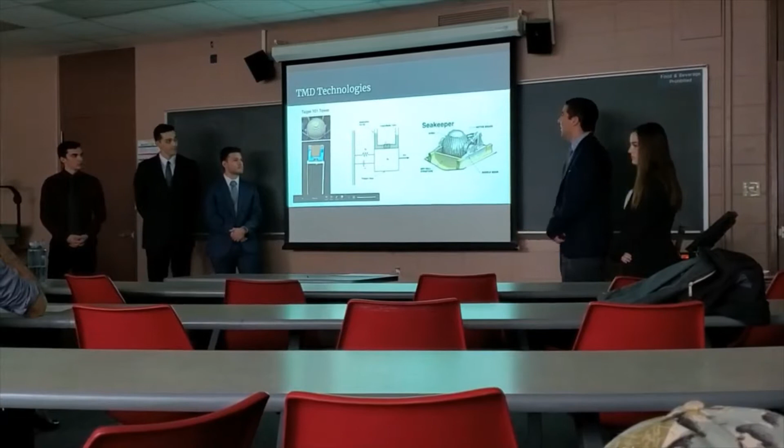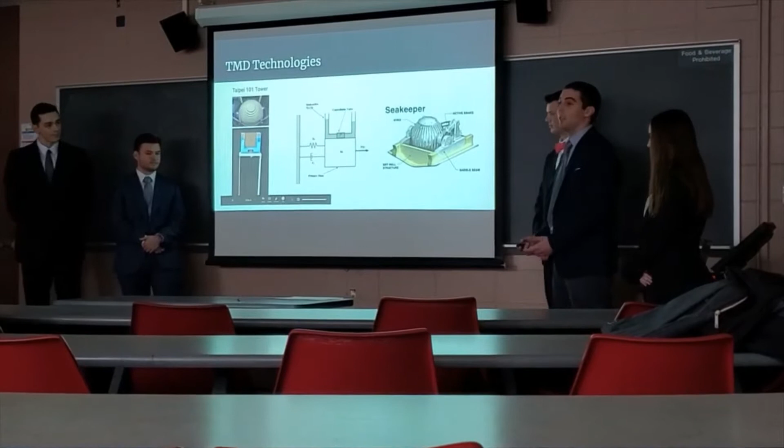In the literature we performed, we found various uses of tuned mass dampers. Tuned mass dampers are in civil structures such as skyscrapers, such as the Taipei 101, as seen in the first visual. This is a passive pendulum damper, which relies on a mass swinging at a specific frequency to counteract the acceleration on the structure. Another form of a passive tuned mass damper is a tuned liquid column damper, as seen in the second visual. A tuned liquid column damper relies on the movement of the liquid in a U-shaped container to counteract the forces on the structure.

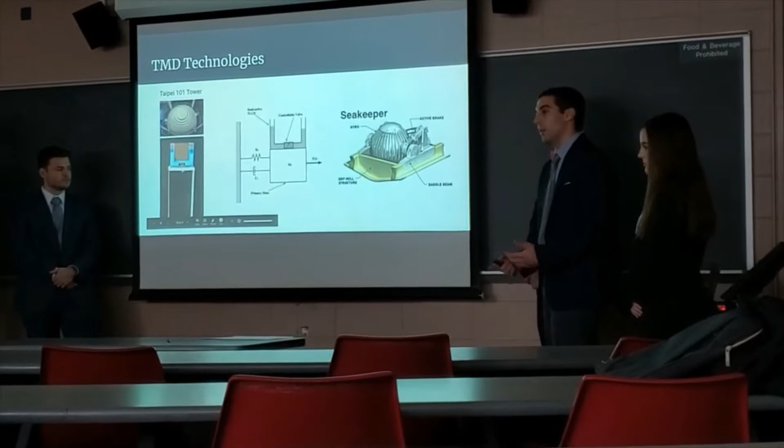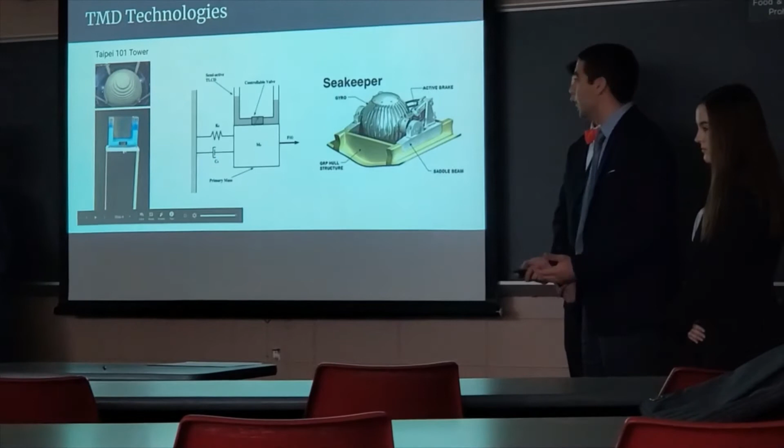The spring force in the tuned liquid column damper is the difference in height of liquid in the container, and the damping is the result of the liquid traveling through an orifice located at the bottom of the container. The downside of a passive system is that it cannot be adjusted during operation, which would require an external power source, sensing, and a controller.

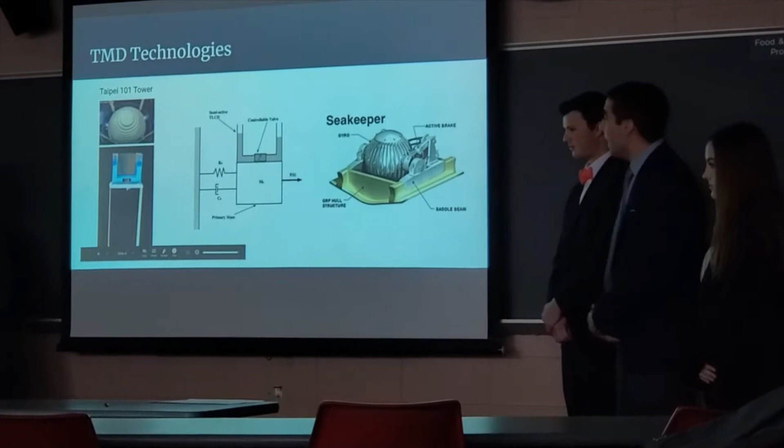So a semi-active system that we found was a semi-active tuned liquid column damper, shown in the third example, and this relies on a variable control valve to adjust the size of the orifice that the liquid travels through to inherently adjust the damping of the system.

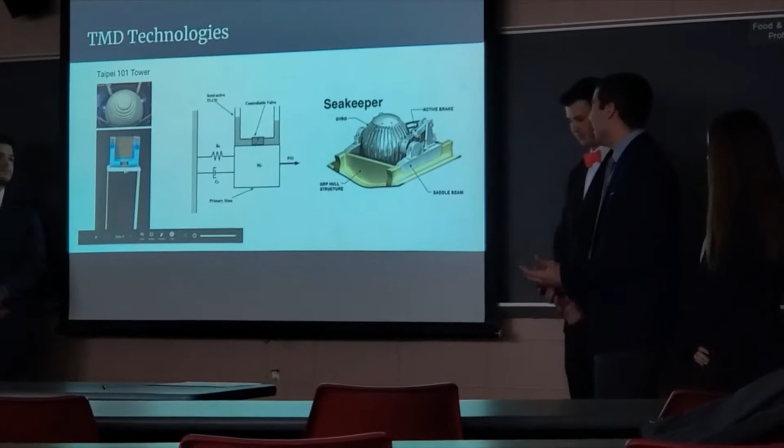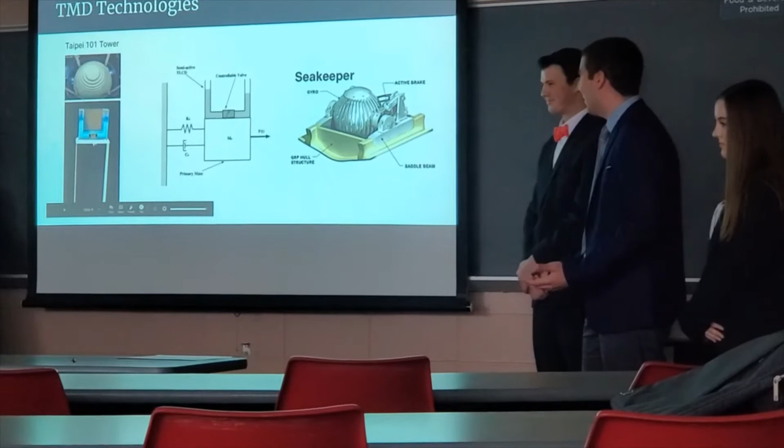Another example of an active system we found, actually fixed in boat hulls, was the Seakeeper, as seen in the last visual. This is an extremely expensive active gyroscopic damping system starting at about $22,000, which is definitely not feasible for our project. This system relies on a flywheel in a vacuum container fixed into the boat's hull, which spins at a really high frequency, creating an angular momentum to create a torque to the system.

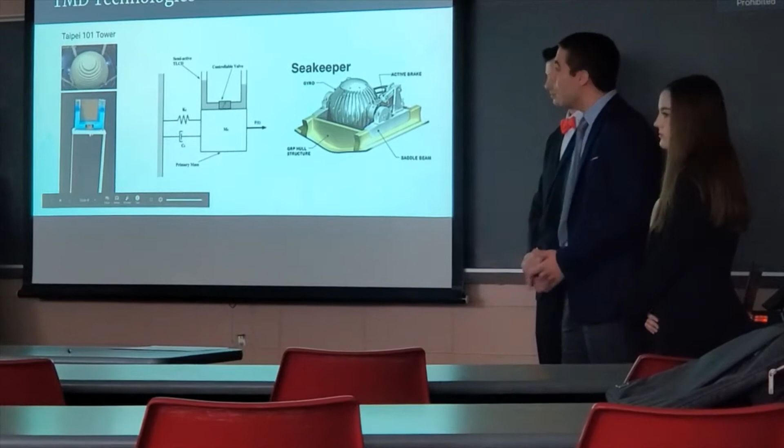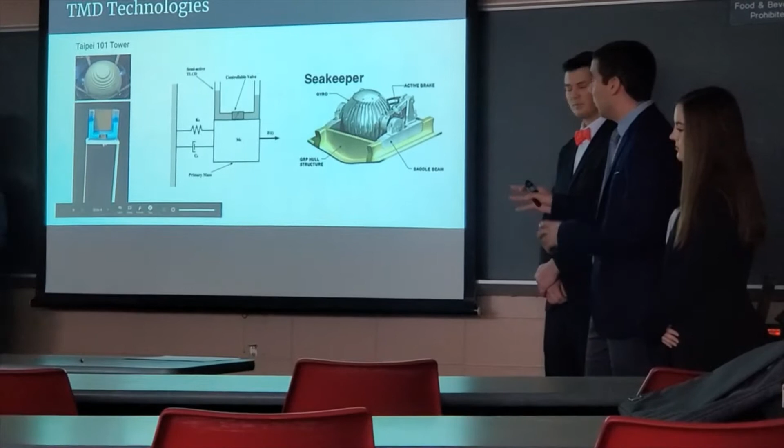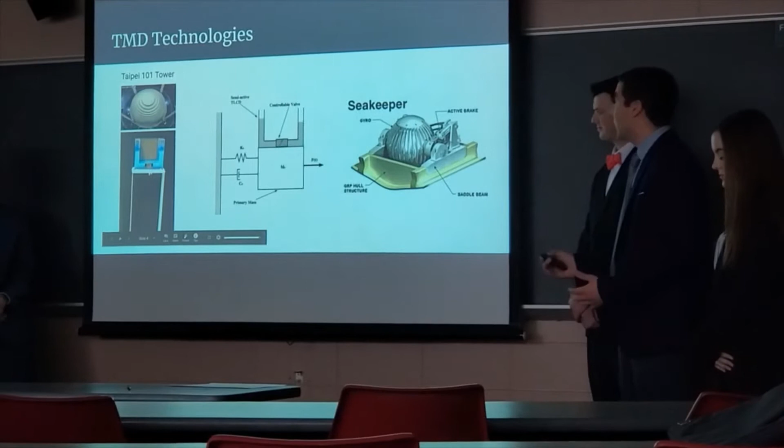This will create a force of torque to stabilize the structure against waves hitting the boat. The active support of the structure will tilt the gyro so that it will provide a wide range of torque at various sea states. Based on these technologies, it guided our design concepts, which were also based on customer needs.

We also came up with a category of importance, on a scale of 1 to 5, 1 being not so important, 5 being incredibly important. We used the results of the surveys and our personal opinions on what we would need and how important they would be to come up with these values.

The first thing I'd like to talk about is the ability to stabilize a kayak. We gave that a 5 because that's the core of our project. If it's not able to stabilize a kayak very well, there's no point in doing this project. Another one is low cost.

Most of the surveys said they wanted it to be under about $100, which is what we're shooting for in cost. We gave that a 5 as well, because that's pretty much the main thing everybody hit on in the surveys.

Another one is the effect on kayak speed. We didn't want to mess with the speed of the kayak at all, because we wanted to keep the experience of kayaking as similar as we can to without the system, other than hopefully it would just be a smoother ride and not tip back and forth as much.

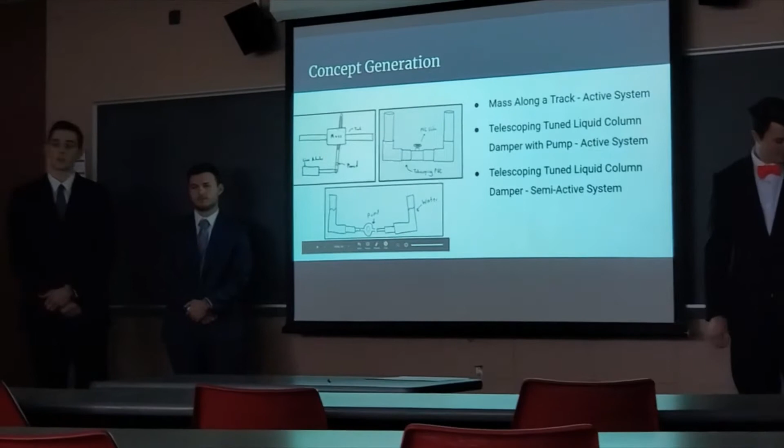After getting together as a group, we saw that some of our concepts had similar or the same components, so we combined them into the same idea. Ultimately we had 6 different concepts that we put through our concept selection matrix, 3 of which stood out in particular.

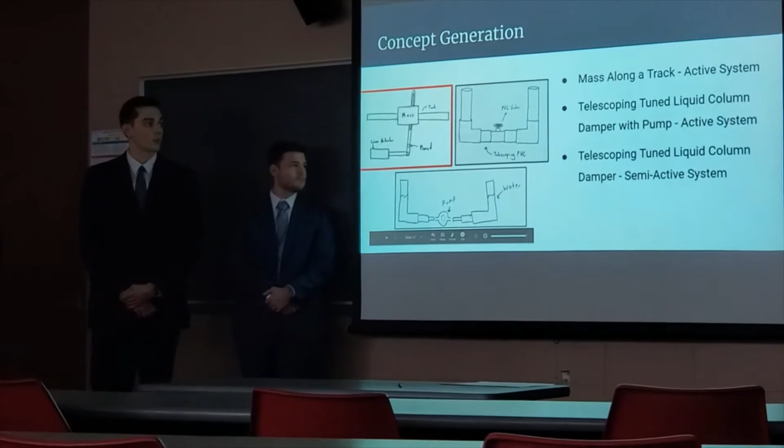The first one was the mass along a track. This is an active system which uses feedback from sensors to drive a linear actuator, moving the mass along with the kayak and changing the center of mass of the system.

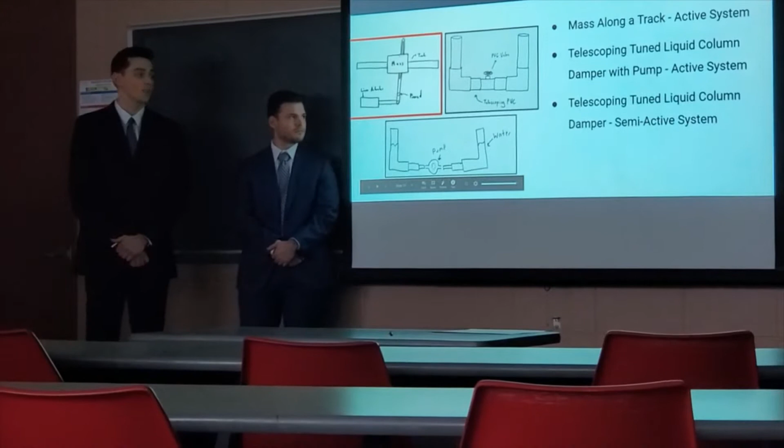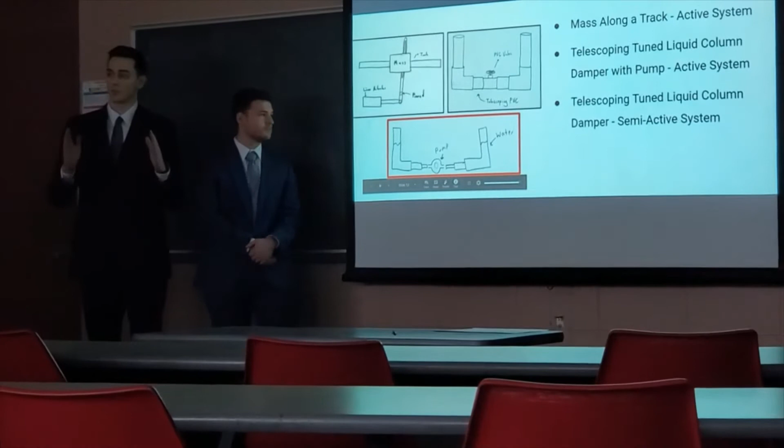The second one was a telescoping tuned liquid column damper using telescoping PVC. Telescoping PVC is a set of interlocking PVC pipes that we could use in the system to fit different kayak widths. This is an active system because it uses feedback from sensors to drive a 2-direction pump.

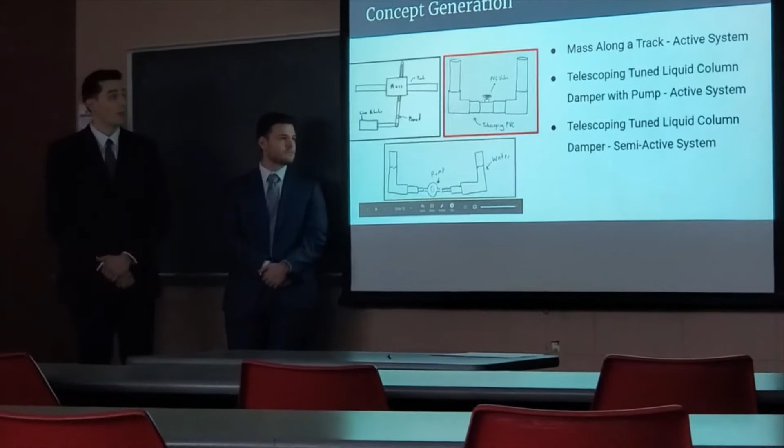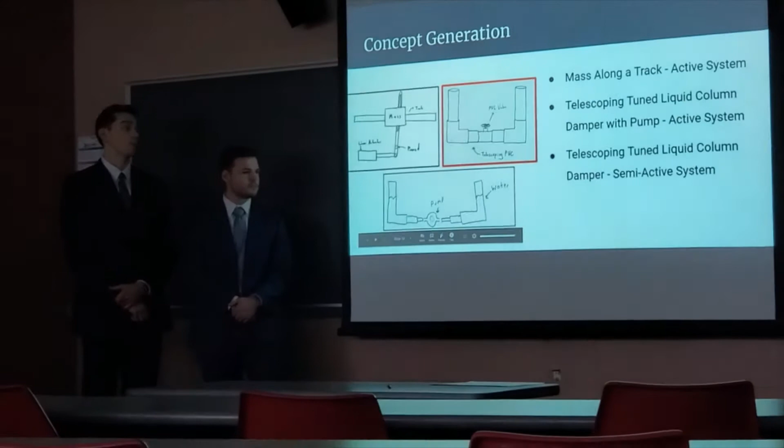This pump dampens the system. The third one was also a tuned liquid column damper using telescoping PVC, however this one was only semi-active because instead of using a pump to drive the damping, it controls the position of a valve, which then changes how the liquid damps the system.

In order to decide which design we wanted to move forward with, we developed a concept selection matrix. As mentioned before, we have the needs and the importances from the surveys at the beginning of the semester. We rated these on a scale of 1 to 5, with 1 being the worst, 5 being the best. I'll go through 3 of the designs here, pros and cons.

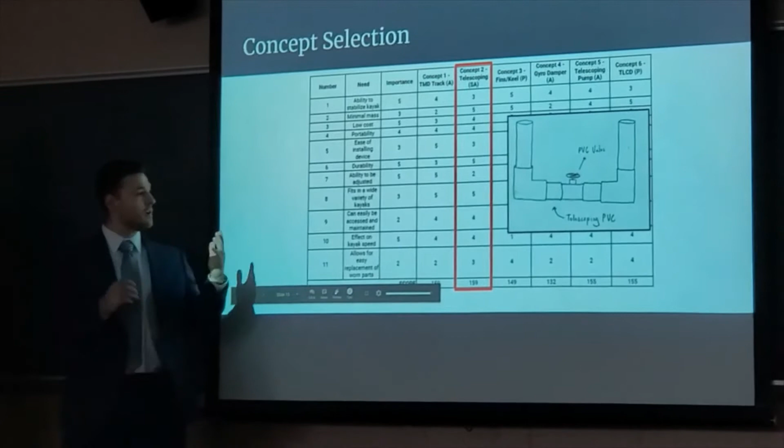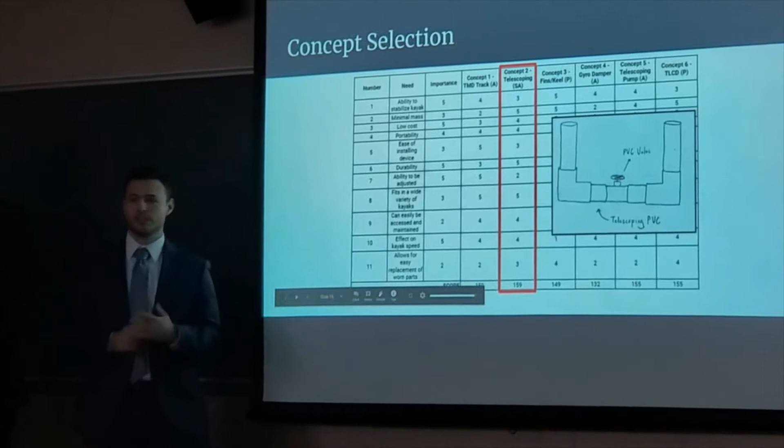The first one is the semi-active telescoping system. The pro of this system is that the telescoping PVC allows it to be adjusted to fit different size kayaks. One of the cons is that it has to be manually adjusted by the user, which is too much work, which we don't want.

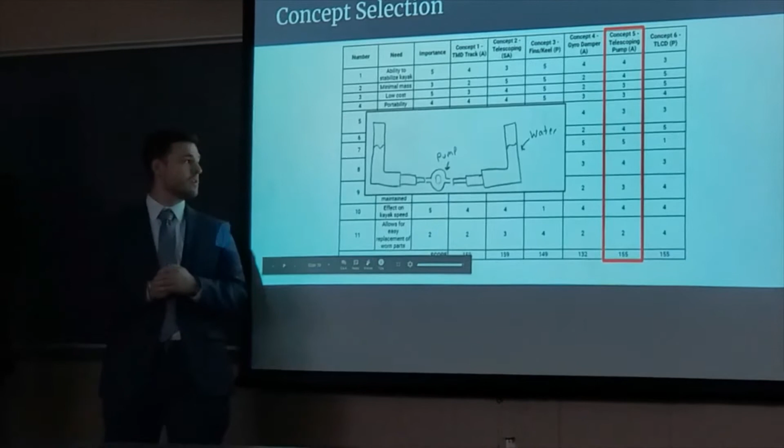The second one is the telescoping pump, which is an active system, meaning the user doesn't have to adjust anything — it automatically adjusts. One of the negatives of this system is that the pump has to be a 2-way pump, which is too much work for us this semester.

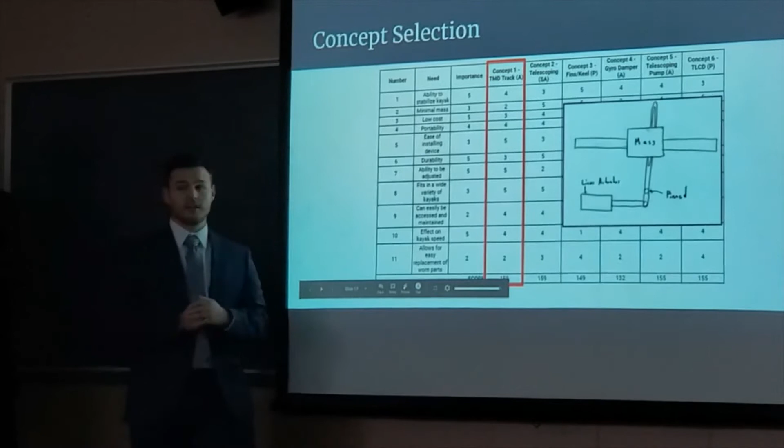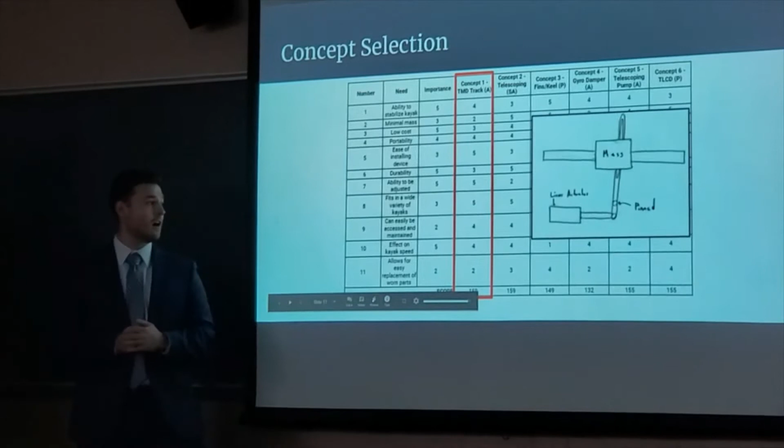And the third and final design, this is the one we're going to move forward with, is the tuned mass damper on a track. That image is the initial design. We've since tweaked it a little bit, as you'll see in the SolidWorks. One benefit of this is the ability to automatically adjust without the user having to do anything. But of course there is a negative, which is the mass of the system. This system is a little bit heavier than a couple of the other ones we've talked about because it has a mass attached to it, but that's something we're going to try to minimize as we move forward.

So how the experiment actually worked: we had Dr. Stewart in the boat to begin with, but after a little bit of testing we realized it was too difficult to do with someone that's not a neutral mass, because when people are actually in kayaks they tend to balance it themselves. So realistically it's not a good way to measure it.

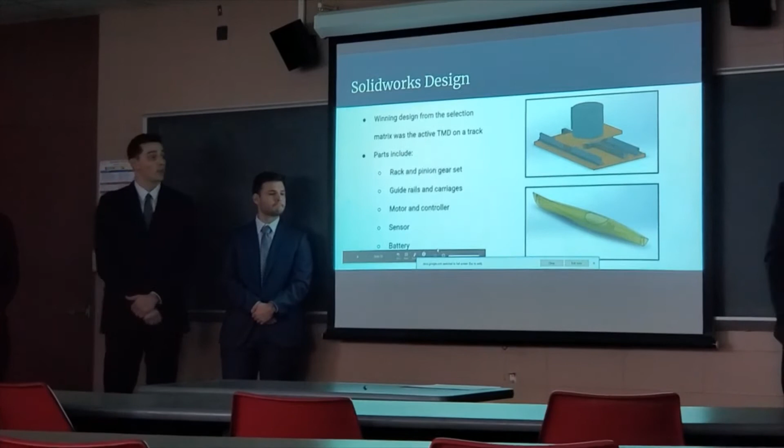Alright, so the winning design from this concept selection matrix was the active TMD on a track option. You can see in the top image that the motor directly drives the pinion gear against the rack, sliding the device back and forth along the guide rails.

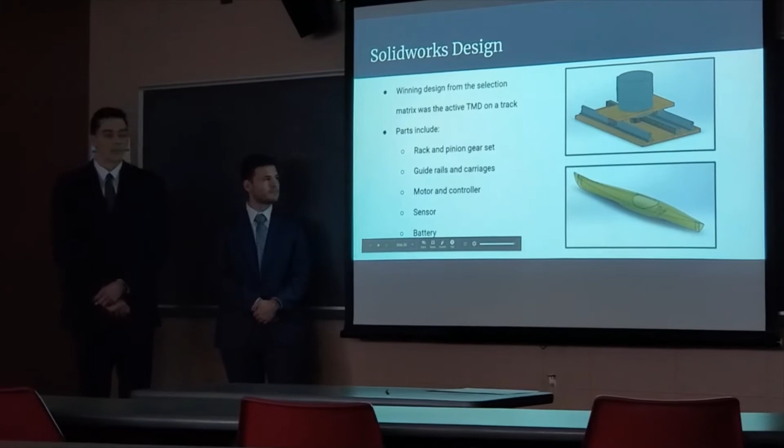Extra weight not shown in the image, such as batteries for the motor, would also be mounted on the platform with the motor. This design is slightly different than the preliminary drawing for the mass on a track, but we had to make those necessary changes to reduce the different types of motion going on, and it just made the controls portion of this project much easier.

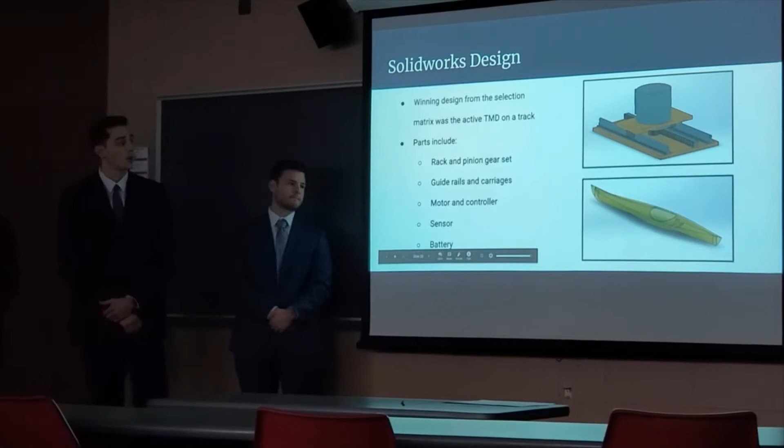And you can see in the second image that the placement of the device would be within the kayak behind the rider at the lowest point.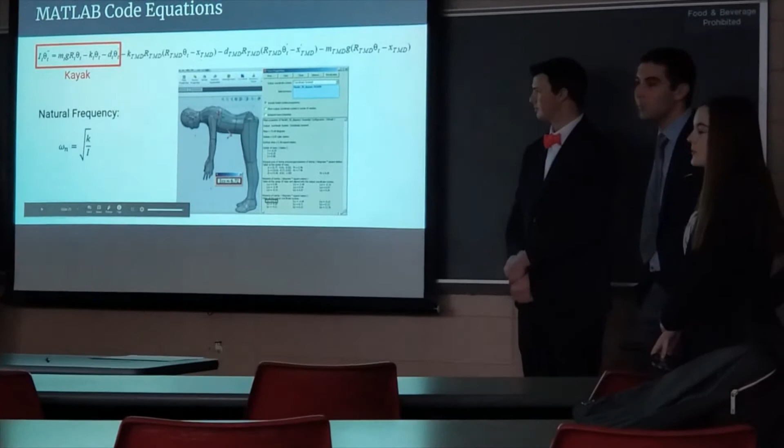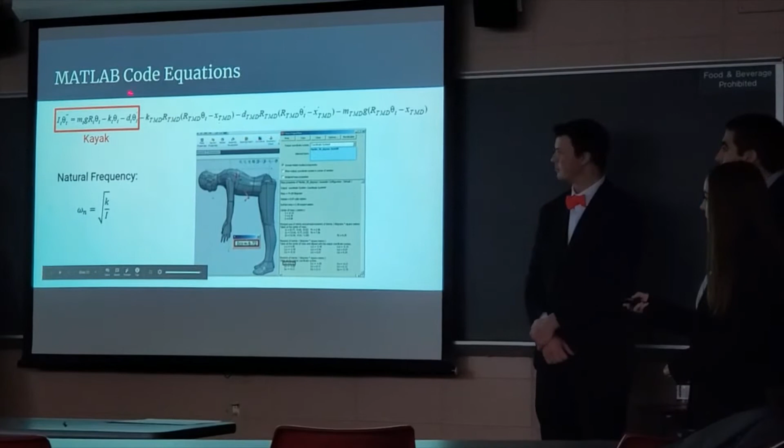Through identification and SolidWorks modeling, we were able to determine parameters of the kayak to analyze in MATLAB. In its equation at the top, the terms in the red box represent the motion of the kayak. The first term is the overturning moment, the second term is the stiffness due to the displacement of water, and the third term is damping.

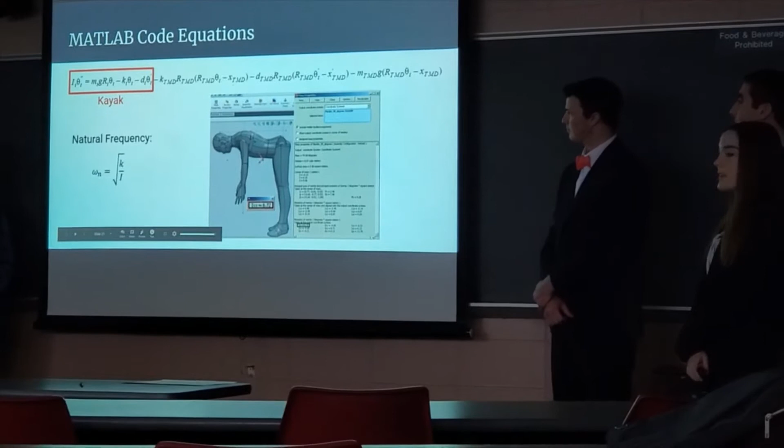So within these terms, I is inertia, M is mass, R is the moment arm, K is stiffness, and D is damping, and theta and its derivatives are the rotation of the kayak.

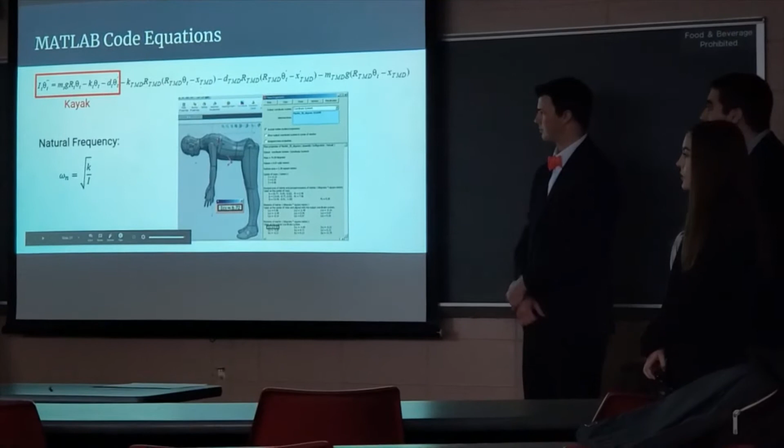So we found the inertia of a sitting person in our literature as shown by the picture on the right. And because a sitting person's center of gravity is different than a standing person's, we had to look into that a little bit more.

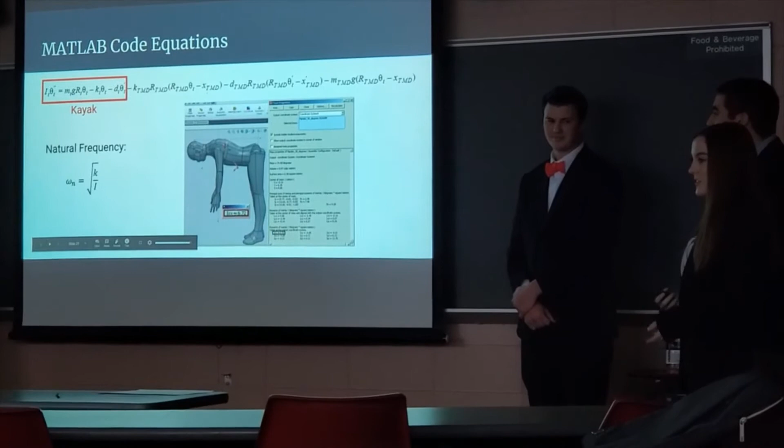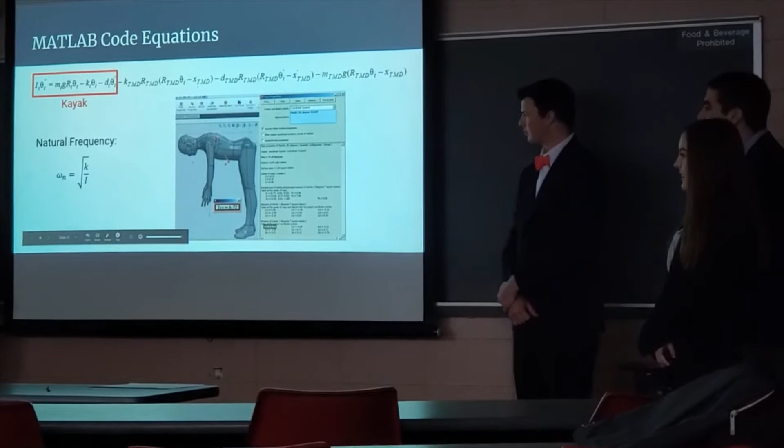We determined the natural frequency of the kayak during our system identification, and the inertia of the kayak was found using the mass properties of the kayak in SolidWorks. Using the equation for natural frequency, which is the square root of stiffness over inertia, we were able to determine the stiffness of the kayak.

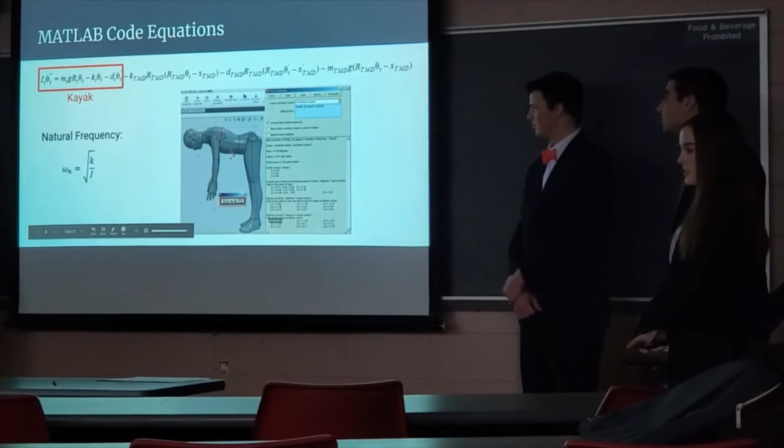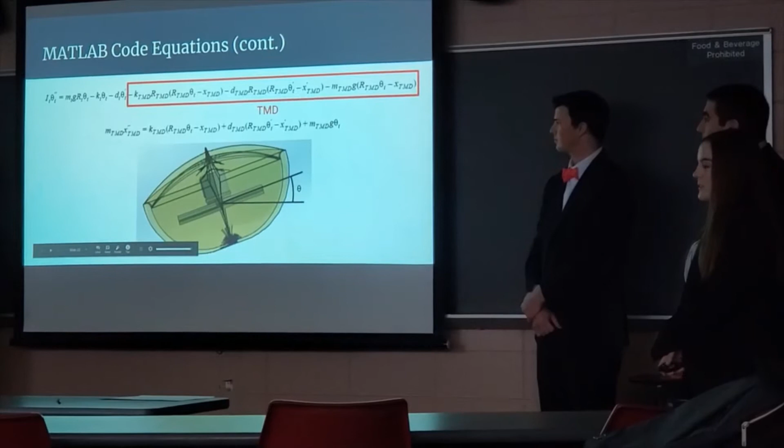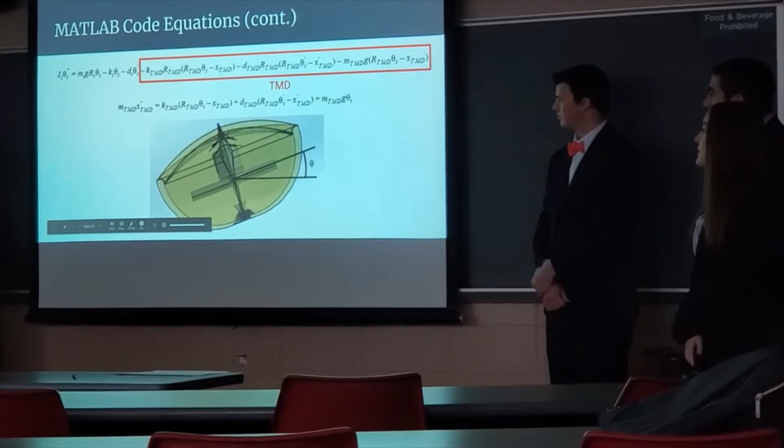So these are a set of second order ordinary differential equations which model a passive TMD. The first equation is the same as on the previous slide, but this time the red box focuses on the TMD terms rather than on the kayak. The first term is the spring moment, the second term is the damping, and the third term is the overturning. In these terms, x and its derivatives represent the linear movement of the TMD.

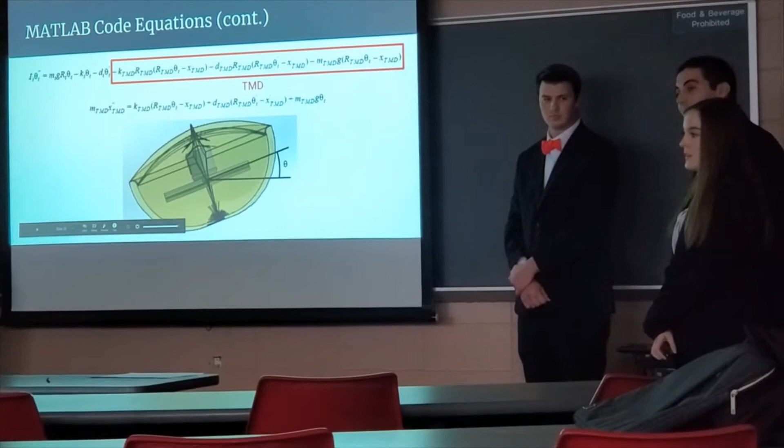The mass of the TMD was set to be 10% of the mass of the kayak and the person sitting in it. And the natural frequency of the kayak was set equal to the natural frequency of the TMD to find the stiffness of the TMD.

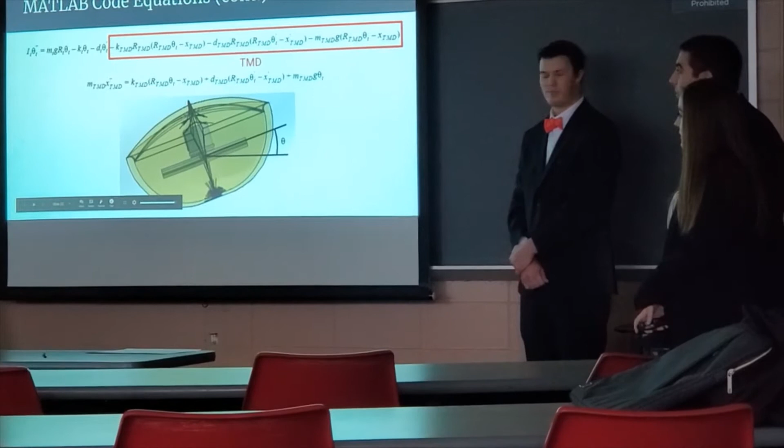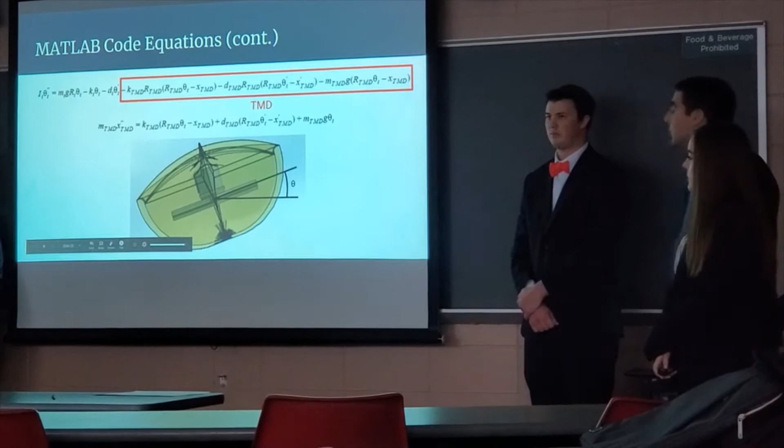The second equation represents equal and opposite forces on the kayak. Although our system is an active system, it was helpful to model the system using passive equations, because it is easier to model a passive system than an active system, and it helped us determine how much support would be needed by the boat.

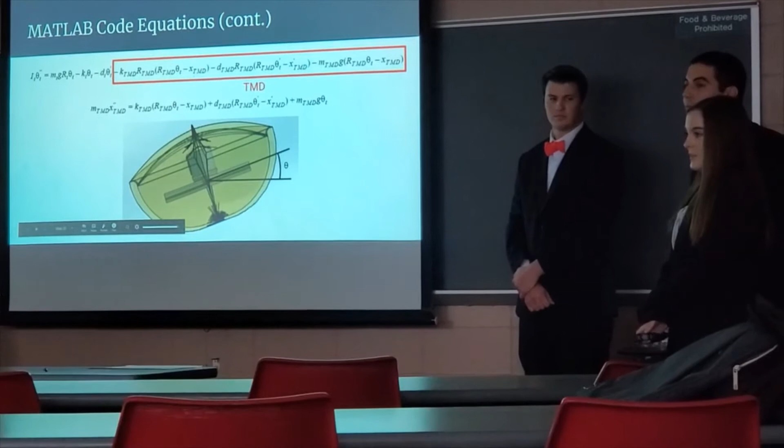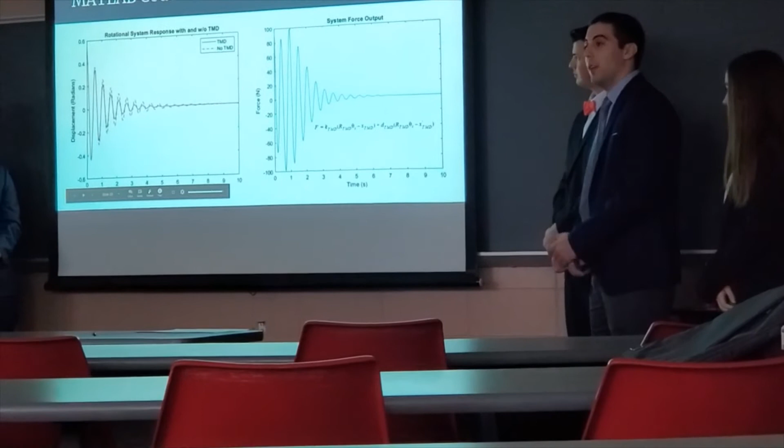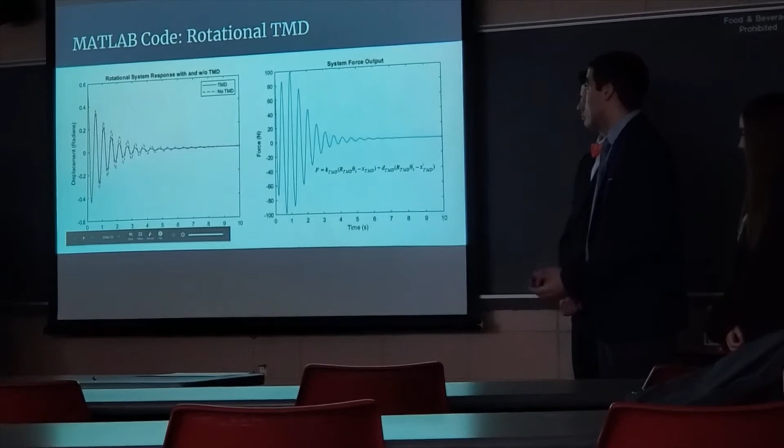So to simulate the suppression of the rolling motion of the boat, a free-decay test was performed in MATLAB. This modeled the damping of a kayak with and without the addition of the tuned mass damper. The two previous equations were coded into MATLAB, and the displacement of the system in radians was plotted over time in seconds. That can be seen in the first plot of rotational system response with and without the addition of the TMD. We've seen that with the addition of the tuned mass damper, the system is nearly damped out after about 4 seconds.

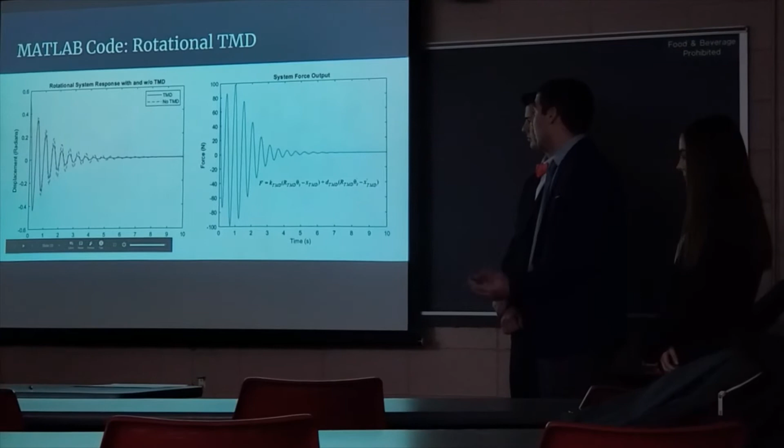To determine the force output of the system, the spring force and the damping force of the system were added together. This would be the force required of the motor to replace the spring and damper of the system. As seen in the second plot, with force in newtons over time in seconds, the maximum force is about 100 newtons.

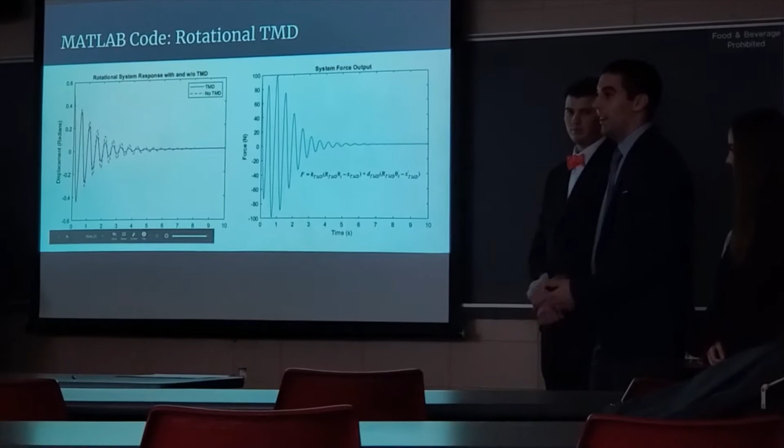So going forward, we would like to put the differential equations into Simulink to create an active damping system that would limit the error of the rolling motion of the boat.

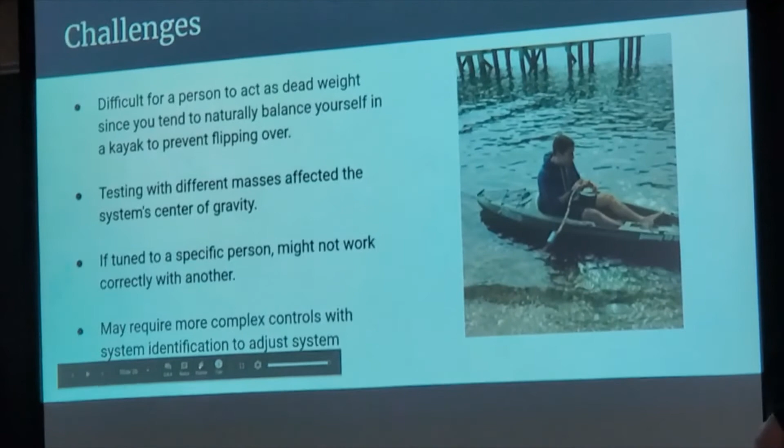So some of the challenges we've hit so far are that it's difficult for a person to act as dead weight to get accurate numbers, because they just tend to naturally damp out. So if the kayak tips this way, the person's going to tip this way just out of instinct to not fall out of the boat.

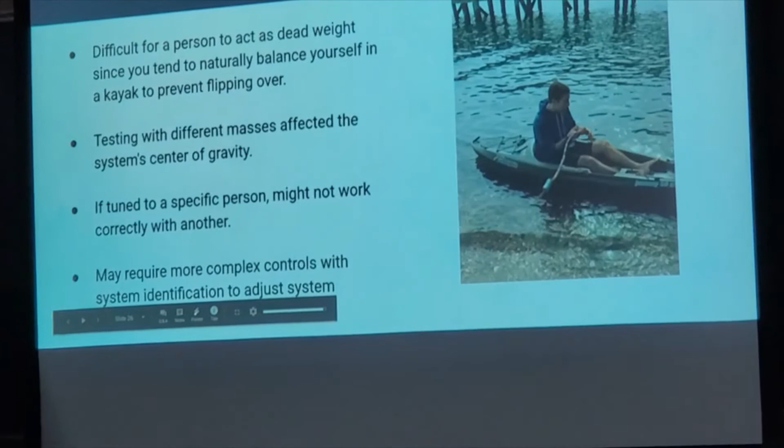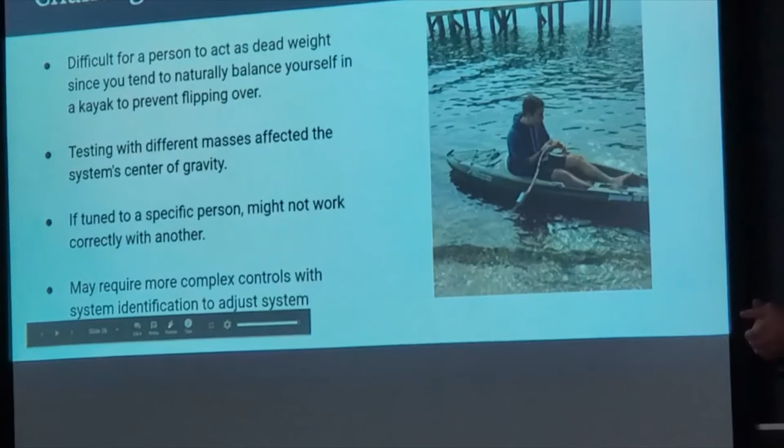Another issue is that if the system is tuned to one person and then another person gets in, that's going to change the entire weight of the system and how everything reacts. So we need more complicated controls to be able to identify that itself and adjust whenever the person gets in and changes the system.

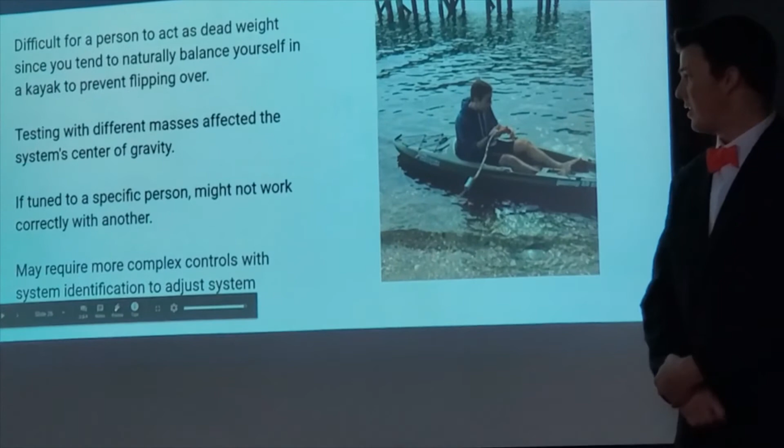Another challenge is that the center of gravity would also change with people. So if a tall guy like Logan were to sit in the boat, his center of gravity is going to be a little higher. If a shorter person gets in, it's going to be lower, so that will also change how the system works.

And thank you for listening. Do you have any questions?

It's been a while since I've done vibrations and dynamic systems, so bear with me. So you talk about the challenge of getting the live person to behave as dead weight, right? But when they're actually kayaking, they're going to behave as live weight, right? So it sounds like you're simulating and programming and tuning around dead weight. What's going to happen when the user is also instinctively reacting, but then the tuned mass damper is as well?

So ideally the system, since it'll be active, will be able to fight against any force like leaning over and things like that. We also want to try to market it towards fishermen. So if they're off one edge and there's a constant force tipping the boat this way, it'll be able to provide that constant force back and keep the boat as stable as possible.

Hopefully it would be able to counteract them if they overcorrect, and if they do just minimal changes, it might not kick in. There would be a certain threshold where if there's little bitty waves, you don't want things slamming back and forth and moving the kayak. So there'd be a certain threshold to meet before it would actually kick in and move it back.

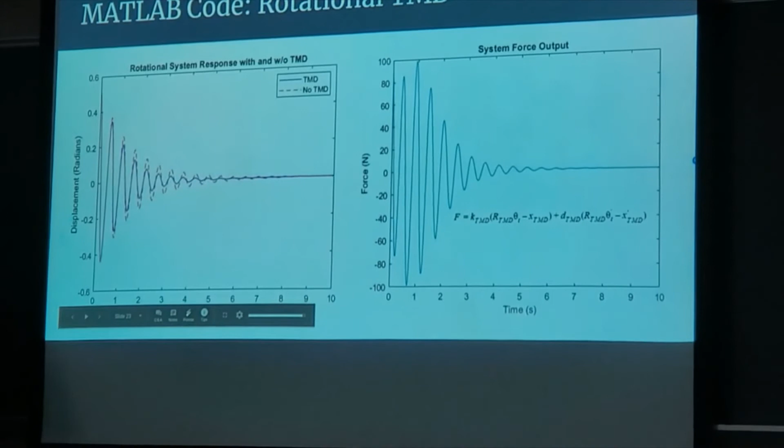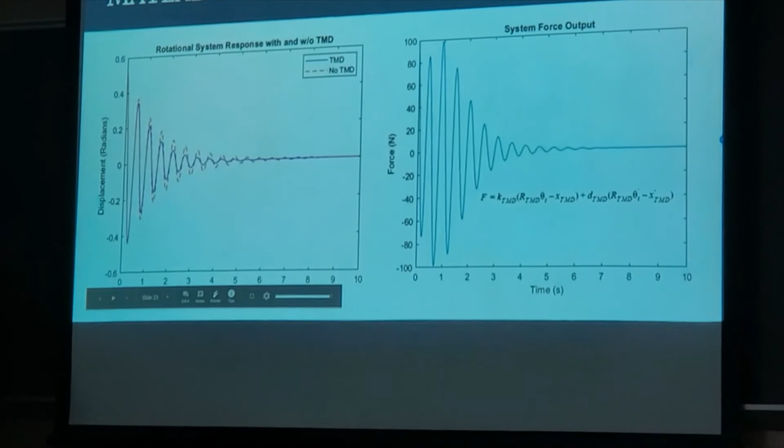I'm just thinking, to produce this, how fast is the motor going linearly? And based on that, what's the acceleration required from the motor shaft, since it's going back and forth? I don't know motors well enough to have an intuitive sense of whether that's going to be a challenge. It seemed like if it was a really fast frequency system, that motor has to be zipping around, and accelerating its own mass could be a challenge.

It's just another thing, but if it's a fairly slow period, then maybe it's okay. I was also wondering, and I'm not necessarily asking for the answer, just thinking out loud, about other potential ways to drive it. Could you do a ball screw that's pulling a mass back and forth? I don't know if that would be better. Anyway, that wasn't really a question, just something I was thinking about for you.

Other questions? Steve? If you put the mass in the back of the boat, how much does it weigh? So we're aiming at around 10% of the weight of the kayak and the average rider of the kayak.

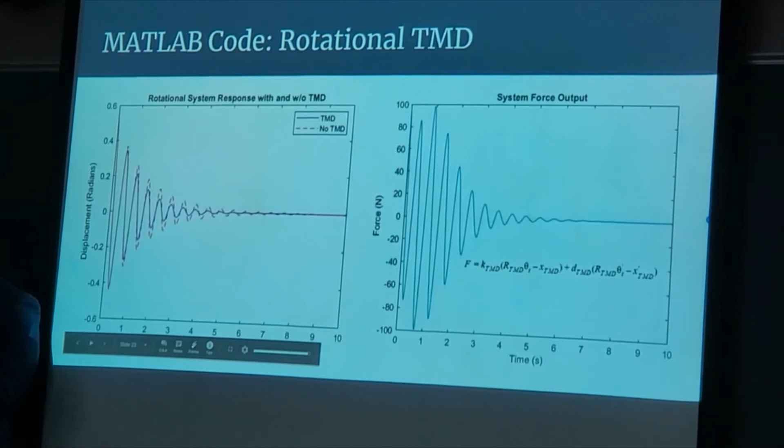And the placement within the kayak would ideally be as close to the rider as possible at the lowest point, because that's the widest spot of the kayak, giving us more room to move the mass back and forth.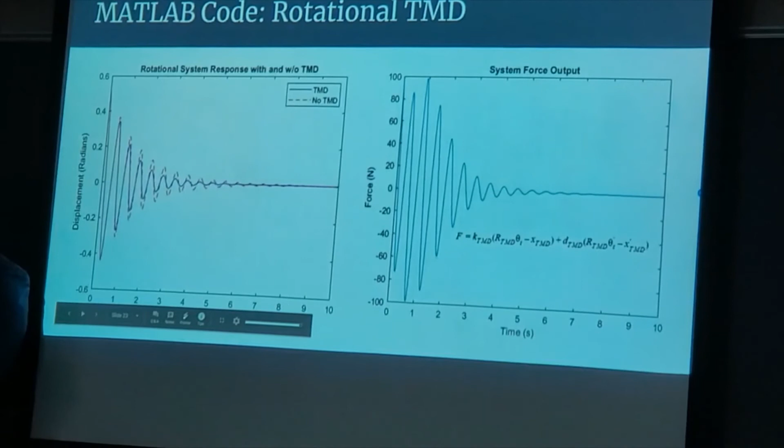With the mass in the back of the boat, is it a weight big enough to affect how the kayak sits in the water, whether the front lifts into the air, or if it stays flat? Since it'll be very close behind the rider, it won't change the center of mass too much in terms of the length of the kayak.

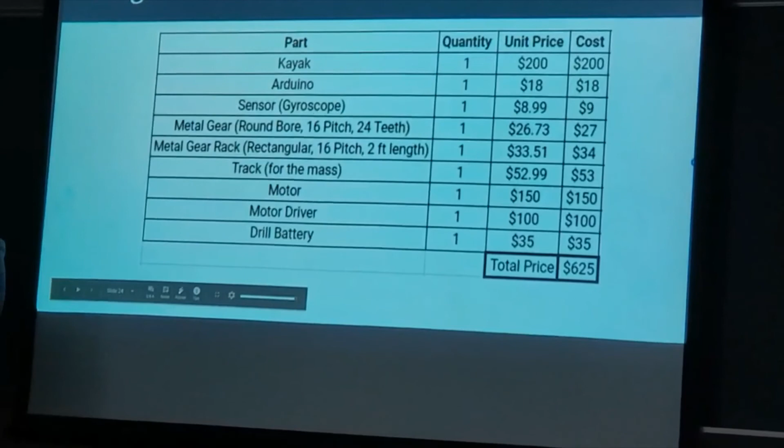Could you flip to your budget slide again? Is the drill battery powering the motor? And have you done any estimation yet of how much energy you need, how much power?

One of the issues we've run into is selecting a motor, because there are a lot of factors going into what we need. It needs to move back and forth relatively quickly, but also provide torque. So it's been a struggle to find a motor, and a lot of the motors we've looked at have varying power requirements. We figure drill batteries are relatively cheap, easy to charge, and can provide a larger amount of power in case we need it.

I'm just thinking, similar to what the bike team was doing, in terms of how long the trip is, how frequently the system is running, and so on. How big does that battery need to be?

Power tool motors are, I think, good performance, things like that.

So, looking at the pictures you've got, this is a system that goes inside the shell of the kayak, right? Okay, so then how do you plan to mount it inside the kayak?

You also talked about wanting minimal adjustments with it, right, because you don't want the riders going in and messing with it. So in terms of powering it, how do you plan on replacing or charging the battery if it dies, making sure your system keeps working with something you have to run inside the kayak, covered so it's not getting hit by water every time you use it? Or can you just take that part out without removing the whole system if the battery dies?